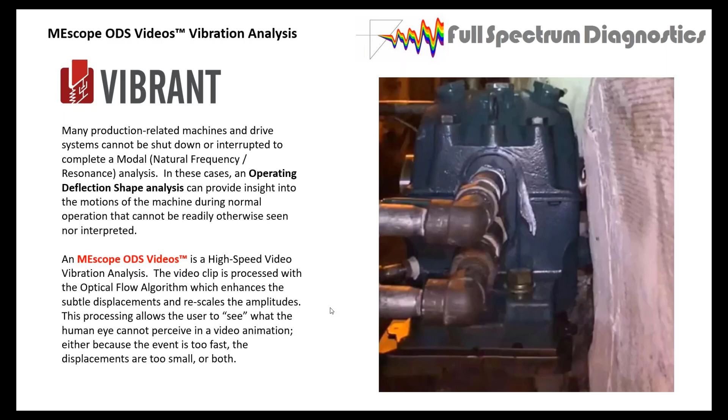This time, and I've never really done this before, but I'm going to, for some reason... I can't advance. What's going on here? There we go, sorry about that.

This unit's asset description: it's a Buffalo Forge induced draft fan, in a boiler house in a power plant. More specifically, the video clip shows the outboard bearing sleeve bearing. You have some water cooling lines coming in and out of it, and what happened was one of these lines plugged. It started eating up the bearing, and then the shaft works its way through the Babbitt material into the bearing housing and makes a mess of things.

This fan is over 30 years old. It's never been disassembled, it's been running for 30 years. They have this current problem that came up, and one of the reasons they've got some heartburn about this one is what you see on the outside here.

This is all asbestos. So they have major controls on this substance in most of the country, especially in California. So that would involve pulling a lot of asbestos out, and they haven't been ready to do that for quite a while. I wanted to show you what this looks like.

So this is the raw video, and there's a couple of things that are interesting about it. Number one, as it goes up to speed, the frame rate in the cell phone gives you a kind of really low frequency, and then you see it goes into what you're looking at right now. You really can't see the motion, even though this is pretty low frequency, it's 300 RPM.

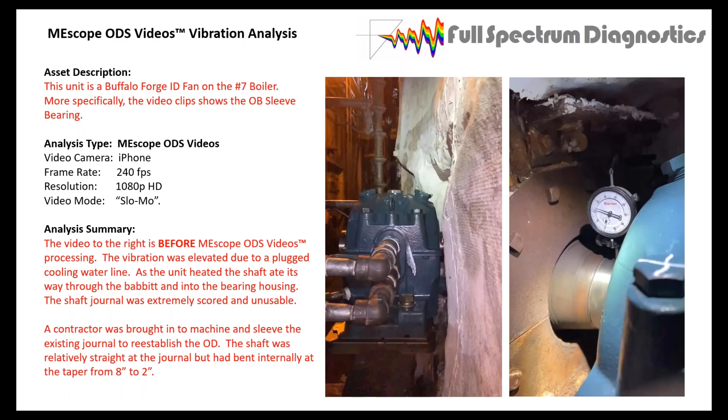This is what startled the people in the power plant. This is the turning speed of the shaft at 300, and it's an axial vibration that's occurring. Why is that doing that? There we go—so mostly axial, a little bit of twist to the bearing housing, and the reason for that was this bend in the shaft.

The resulting measurements—they had 14 mils of runout, which exceeded the maximum for the bearing, which was supposed to be 6 or less. The radial vibration was 4 inches per second. I don't think that's a very good place to run. And the axial movement was near 10 mils of motion.

We're set up right now so that we see the axial position of the bearing, and we see vertical. So coming out at us would be the third axis that we really don't detect. Our brain tries to put it together, but mostly we're just seeing this horizontal motion in the axial direction of the machine and a little bit of lifting. If we look out here, the shaft's following it, so there's some kind of bend causing that type of motion.

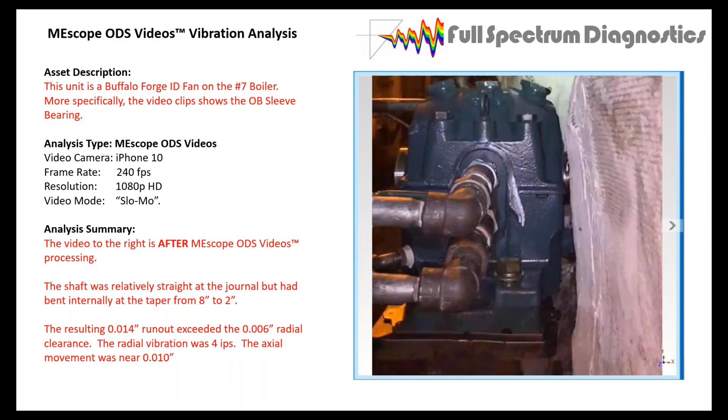This is right after the MEscope processed it for the first time. We see the top data, which is the time waveform, and the bottom data, which is the FFT, or DFT—digital or discrete Fourier transform. So that's the spectrum, and this is the waveform. I'm trying to show both of them. The time waveform picks up all the little wiggles and things in the spectrum. It's the full view of this—any wiggles in the waveform are going to be picked up.

It's all simultaneous. Down here, when I put my cursor on 1 times RPM, so the 300 CPM there, I get a filtered response of just what's at 300, and none of the other harmonics or anything going on. So this is more of a filtered vibration analysis.

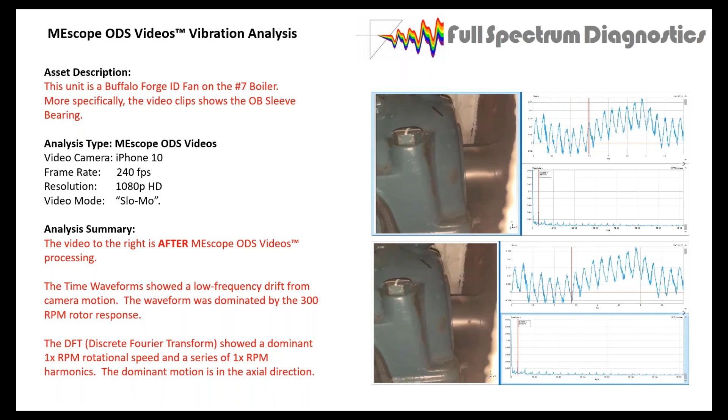This is interesting, and I'm going to get both of these going here. Remember I said the needle was the highest vibration. In this case, every time that shaft turned 1 revolution, it was banging—what looks like what's going on is the little spring in there bouncing around. Yes, but in a video representation, this is moving the most of anything.

And I get this real low frequency wiggle going under here, and the high frequency—every time the eccentric side goes through, I see an impact. It's not really an impact, but it's causing that needle to move, and the same thing up here. All these little things are spaced at 0.2 of a second; if you do the math, that's 300 RPM, and you're seeing that wiggle every revolution of the shaft.

And that shows up on our dial indicator.

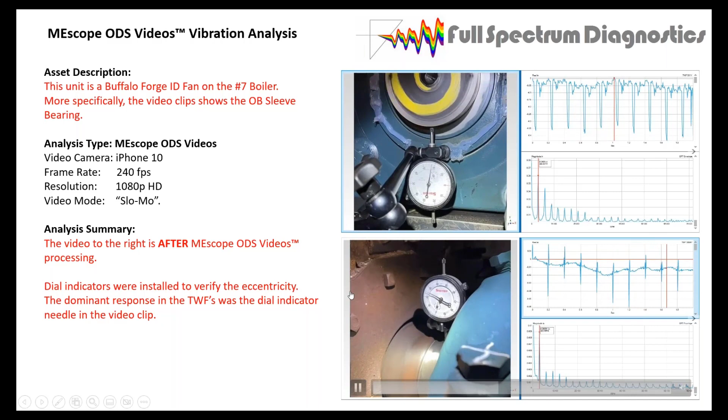So conclusion: ODS video analysis found elevated vibration at 300 RPM in the axial shaft direction. This suggests potential faults such as a bent shaft, cocked bearing journal, or a significant looseness condition. Notice the things up here—bent shaft, cocked bearing, looseness—these are things that can occur in the axial direction, and that's basically what I saw.

So they send me a video clip like this, I throw it into the software, process it, and tell them what I see. If they need another view, or I think they need another view, I'll tell them to go take some more data and send it to me. I'm missing something—but normally, if you're out there doing this type of work, you'd want to do horizontal, vertical, and axial as much as possible, just to get a good feel for how everything's moving in the machine.

So the dial indicator indicated 14 mils of radial runout and 10 mils of axial runout. Traditional vibration analysis performed by the plant guy showed 4 inches per second - very large vibration. So this is the kind of stuff in this case that stops the room from breathing for a minute when you realize what's really happening here.

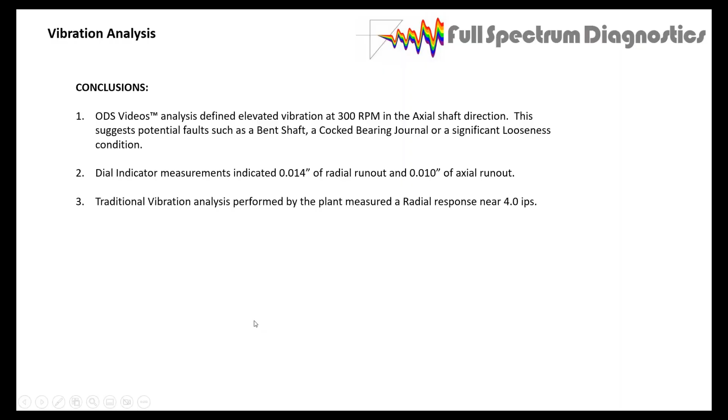Okay, that's the first one. Got a couple more here. This one's pretty cool, and I've never experienced this before, but it's pretty cool. So ODS videos again.

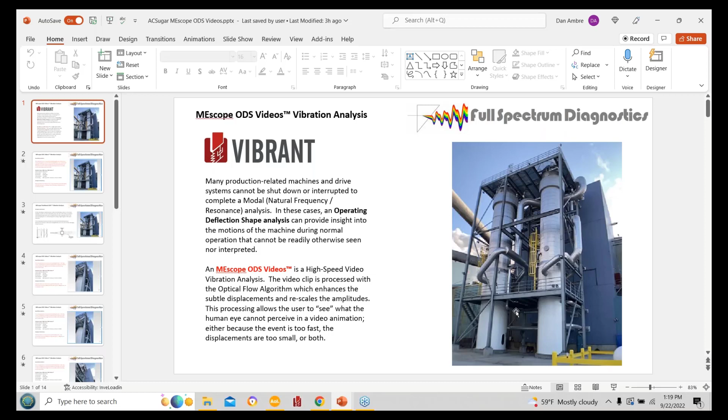We also boxed in this platform here, so we could see how the whole platform is acting like a floor, and the same thing up there - so there's maybe 20 locations all the way around the upper platform. So you put it all together, and you get some good data. In the videos, you just stand back in the parking lot and get an overall shot, then some close-ups, trying to get all the perpendicular directions to see what's going on here.

This is the first video. And you got to look at it for a little while before you see what's going on. And this is in the time waveform. So I didn't pick a frequency to look at - I'm looking at what the waveform is telling me.

And it looks like these two cylinders are in phase with each other. They're moving side to side. So the free flow of air is going into the frontal face of these cylinders, and some process is going on called vortex shedding. At least we think so.

So this unit performs a concentrated refining process. There's no rotating equipment in the framework platform or any internal agitation. The only source of vibration is internal turbulence in the process itself or wind loading that might induce unstable vortex shedding around the tanks. And we'll get to what vortex shedding is in a moment.

Here's my setup for the iPhone - again, it's the highest frame rate we can get, slow-mo presentation mode. And the analysis summary to this point is there's definite frame and tank motion. The animation source was likely a random wind gust created by vortex shedding, and the amplitudes surprisingly were very small.

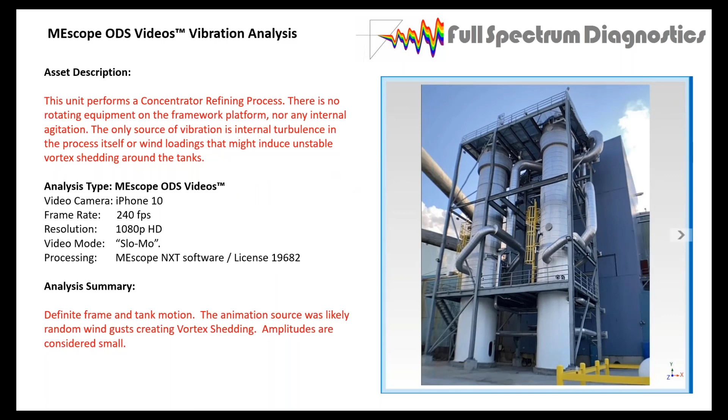Vortex shedding is a phenomenon where the wind blows across the structural member, usually across a circle like this or a cylinder, and vortices are shed alternately from one side to the other. So if you drew a sine wave around all these things, when it's shedding like this at a certain prescribed frequency, this is going to be your driving source inducing a natural frequency or a resonance condition inside your cylinder. And I believe that's what's happening here, at least up here, part of this.

Okay, so there's really no bending in the piping around here. We really couldn't measure it anywhere anyway. So all the way up here, with the wind blowing by, we get some different directional response.

Over here is a little chart for a cantilevered beam. You can have a cantilevered beam of a certain length and you'll get a natural frequency. This is the first bending mode. It goes to zero at the base, but it can swing left or right.

I just turned this presentation on its side so we can see a vertical cantilevered beam. Second bending mode looks like that. Third bending mode, you get another wiggle, in this case the 1 by 1 foot, 70 foot I-beam.

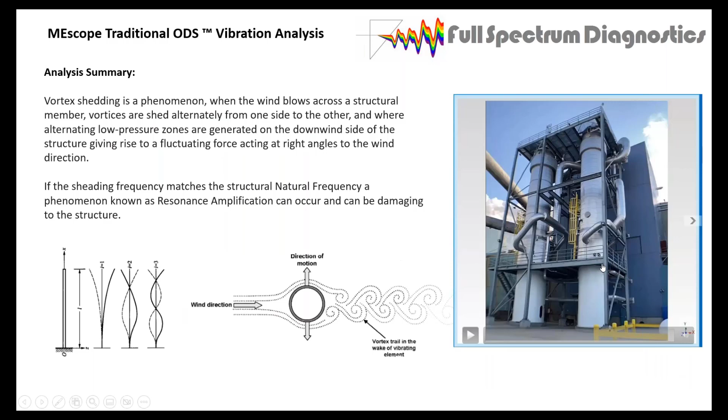I took a lot of data, different camera shots, going all the different directions and the corner directions and everything. The one I found most useful was this one. So I walked up to this I-beam and tipped it all the way up so I could see this upper portion of the structure and see what the beam is doing.

And you can't see this when you're there. I processed it and I was pretty surprised at the motion. If they're looking at the motion here, at this company, that's going to scare them a little bit.

So we did do some actual accelerometer measurements so that we could see what the level actually is, and we'll get to that in a second. What this is, is a definite frame and tank motion. It's 120 CPM, or 2 hertz. That's the frequency of the occurrence. The animation source was likely random wind gusts, and amplitudes are considered small.

Okay, there's another mode. There's a whole cluster of little modes down at the low frequency end of the spectrum. This one's definite frame and tank motion, 180 CPM, which is 3 hertz if you're a hertz guy. And this is in the alternate direction, so it's not going in the direction that we just saw. It's going more in the kind of cross corner look.

If you look up here, the platform at the top, it's more of a lateral motion around the building. This is the beam behind that, so it's closer, one of the 6 beams that's closer to the building. It's 180 CPM, 3 hertz. Again, it's not flexing this beam as much, but it's more of a rigid body corner to corner motion.

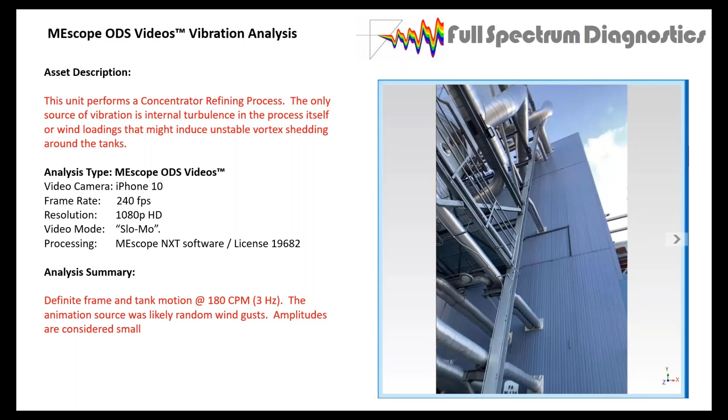Now, since we had an idea that something's going on, it looks like there is a natural frequency in this platform structure, at least 3 of them that we measured or looked at, but they could be amplified. So one of the big pieces that's missing was how much wind is required to get this thing resonating.

We put together an MEscope model, and this is a pretty rough model, but that's all you really need for an application like this. All the arrows on here, it's a little messy, but there are 357 measurements on the structural framework, which is a lot. Went up and down the boom for...

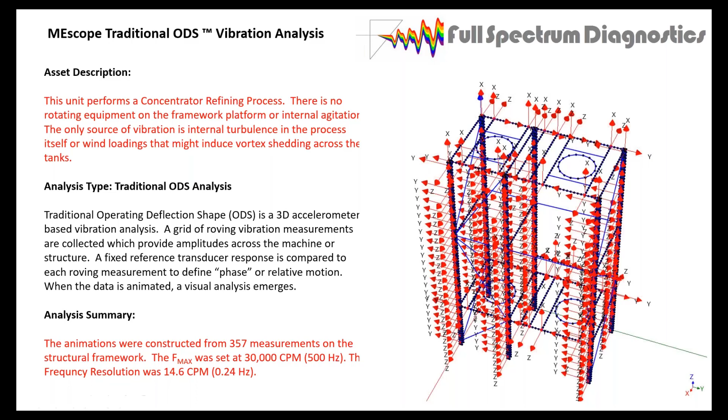4.5 of these units. There's a couple of beams in the 4.5 of these big beams. There's certain levels that we couldn't get to, but we got enough to get us the low frequency modes that we were interested in.

This is the vortex shedding again. So here's my application, one of the 6 beams, and it's moving like this. In my application, all 6 are doing the same thing. They're all moving in the cross axis here. They're all in phase with each other. The whole structure is flexing that direction.

So we have, and this was nothing operating, the unit was just forcing fluid through the tanks, and the wind was blowing. That's it. Now I've amplified this a lot so you can see this, but you'll see in a minute it may not be as bad as it looks. So it probably is doing something like this. I don't know if it's blowing past the cylinders that are giving me the problem or past the I-beams, because they'll get a different shedding frequency going on. But we'll see.

This is that same mode, constructed at 152 CPM, about 2.5 hertz. So it was very close. We had 2 hertz before, but our resolution is much better with the accelerometers than with the camera. The picture's better on the other one, but this one's better because it's put together from real data, not fake data.

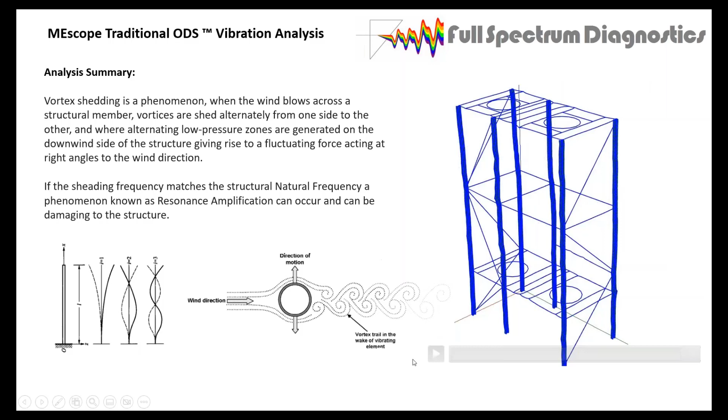And that was this one, I believe. This is the third one I picked up, at 381 CPM, or 6.35 hertz. It's the first torsional mode. So if you look from the top, this thing would be twisting all over the place. I try to use the same view all the time so it doesn't get confusing, because it's a mess of beams in there. But there's a twisting mode. From the top, or from the bottom, everything's still - this is the rigid body motion of the twisting or torsion mode. Amplitudes are on the order of 0.022, so very small.

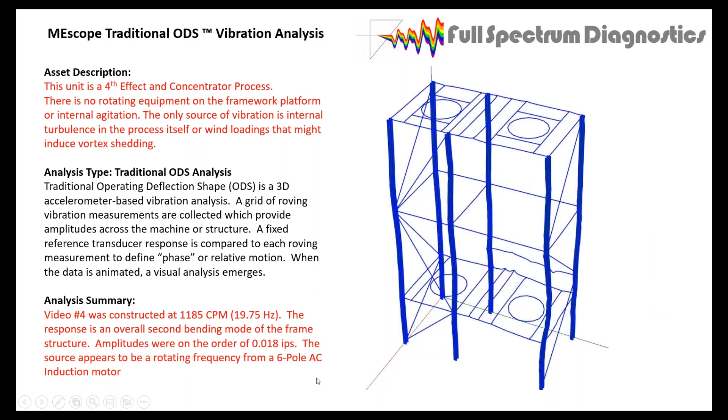This is the only one I couldn't make any sense of. This was occurring at 1185 CPM, so that's 19.75 hertz. This appears to be a 6-pole motor driving this frequency - with a little slip, it's basically a 1200 RPM motor. The amplitudes are on the order of 0.018, so still really tiny response. But you can see these three beams are moving in the same shape, so it looks like a second bending mode in the cross axis, or the longer axis.

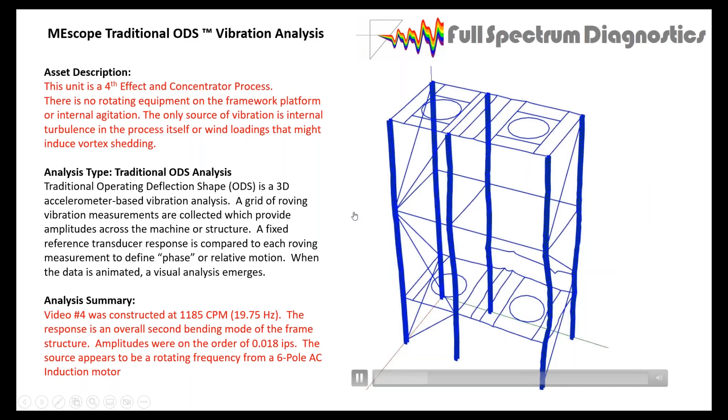Conclusions: the analysis confirmed that the concentrator tower was vibrating. Vibration analysis indicated low frequency rigid body motion of the frame structure. Traditional ODS vibration measurements were not elevated, but the response suggested natural frequency modes that were being amplified by some source, and wind is the likely source.

Potential sources of vibration were wind-related, or flow-related turbulence from the process. Wind can create unstable turbulent flow around circular objects - this phenomenon is known as vortex shedding. Transitions in the piping can also cause unique internal turbulent flow, though I think the case for that is a little less because of what they're putting through. It wasn't that turbulent.

Vibration measurements were cut short due to wind gust concerns. The man lift was wind rated near 28 miles per hour. The steady winds were greater than 21, and we really didn't know what the gusts were, so we decided once we got up about 50 feet, nah, not today. So even with the winds, the structure didn't appear to be vibrating excessively. The reason we were there was because it was probably a windy day, but one of the lights on the tower was flickering - probably just loose and moving in the wind, but you never know.

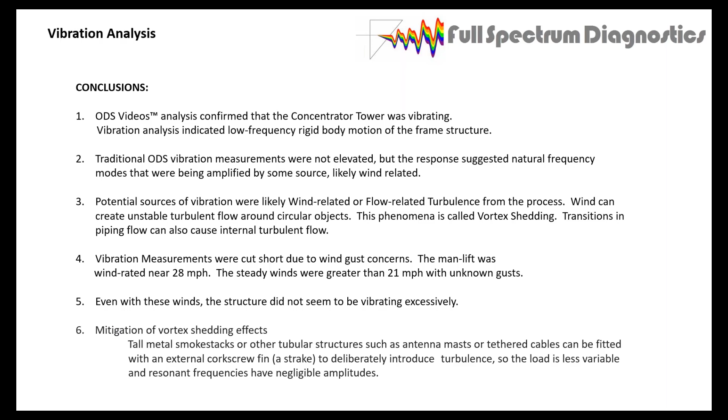There are mitigations to vortex shedding effects. Tall metal smokestacks or other tubular structures, such as antenna masts or tethered cables, can be fitted with an external corkscrew fin or a strake. This deliberately introduces turbulence so the load is less variable and the resonant frequency won't be able to build. These are a few of the corrections - I'm not saying we should do one for this, it'd be a little more difficult and expensive since it's already assembled. There's a helical strake that you see on a lot of big towers.

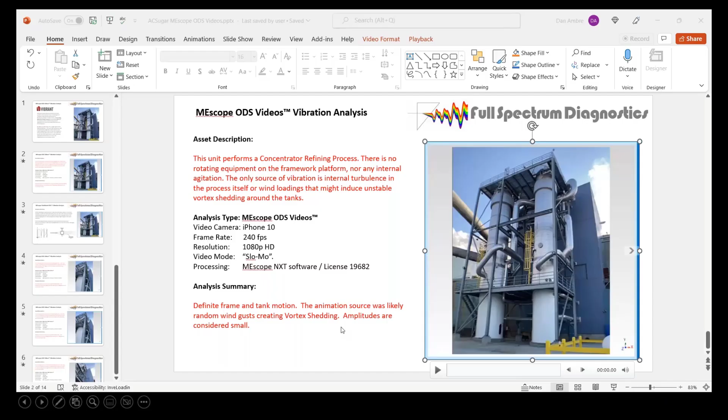Okay, we'll try one more, see how far I get. It's about 135, I think I can squeeze it in. Oops, sorry about that.

We didn't get a whole lot of input from the customer. The friend of mine, he took the data and sent it to me. He can't get anybody to tell him down there what the machine does, how it works, what the speeds are.

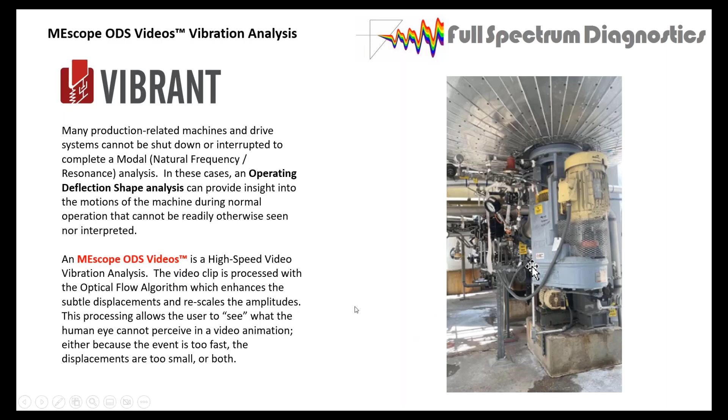So ODS video is perfect for this. This is the first shot. We can look at what's going on, and once it gets moving, you can see how all the plumbing lines follow.

The two interesting things here: you can see this line opening up, so there's something wrong right off the bat in here. Yeah, it's not any good that you have fluid flowing under the corner as well.

The hydraulic pump, this is a belt-driven pump back here, and the motor looks like it's pitching, so there's either a belt misalignment or a loose motor mount. And since the pump and the motor platforms are both on the same block, they're just moving along with it as well.

Other things of interest, there's distortion right here. Here's the shaft with a coupling on it. And this guard, I've noticed on a lot of machines, it doesn't do well with screens like this as far as animation. Don't know why yet, I'll have to figure that one out.

By the way, every job I do with this thing, I learn more and more about different ways to think. Just like the little needle on the gauge might show the highest vibration, but it has nothing to do with what you're dealing with, the whole structure globally.

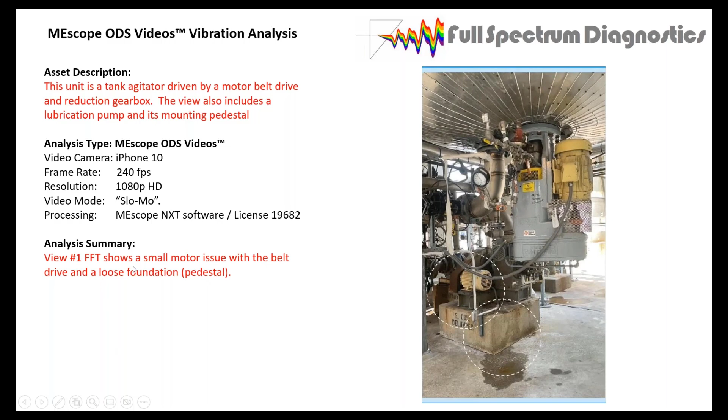So view number one, this is the FFT view. Remember, we can look at it in the time waveform or the frequency domain as well. So it shows a small motor issue with a belt drive and a loose foundation pedestal.

I have another view. So basically they walked around and shot different views at the bottom of the tank and this motor gearbox structure. And in the background were things I was interested in.

So here's that hydraulic motor or hydraulic pump. Here's the belt drive that drives it. And you're sitting on a block, and you can see motion in the block between that and the floor.

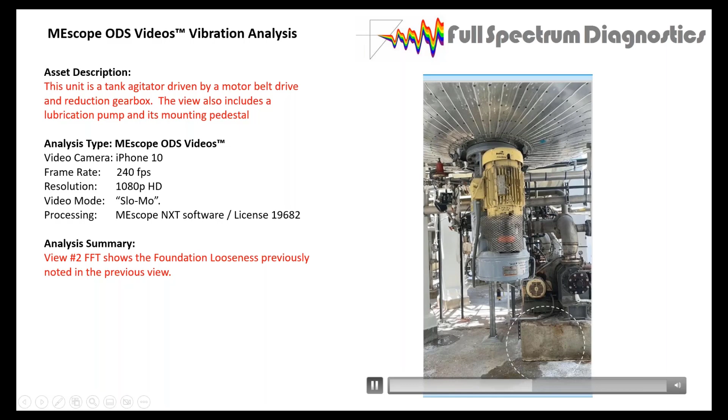Another angle. More motion in the motor down here and the block lifting off. Just little piping motion in there, that's pretty normal.

I had to process this a little bit differently. I had to remove some of the pixels or grid points because this was, I don't know what it was, just a plastic strap or something, and it was moving around, so it showed the highest vibration. And here's probably another one I missed. This would show a high vibration as well.

This is the time waveform look at the same thing. So when I'm doing a frequency analysis, I remove all the background. I keep this in the foreground so I can see what it's doing, and I move around this pedestal so that I can isolate it, and everything else in the background, the floor, the wall back here, all this piping, I can turn off.

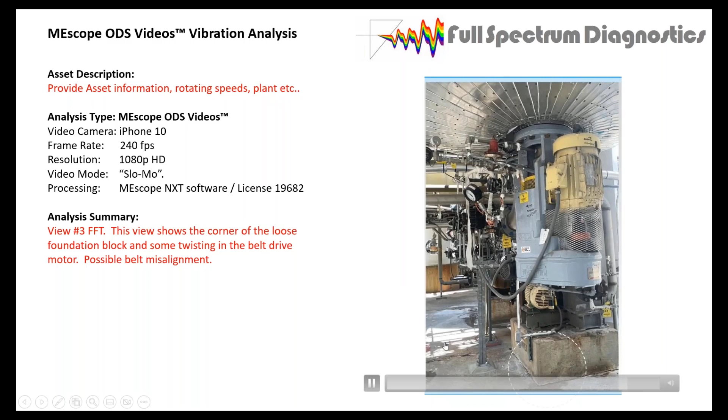So it doesn't show up in the animation. See how this is all not moving a bit. Here, I'm allowing it to move, but I'm looking for this base. So if I have a loose base here, I know what it looks like. This one should also be moving if it has a loose interface, and it doesn't appear to.

So I have there and there are good. This one's shaking quite a bit, as we've talked about. This column here also has a little bit of a jitter to it. Okay, so that's in the time waveform. This is in the frequency response.

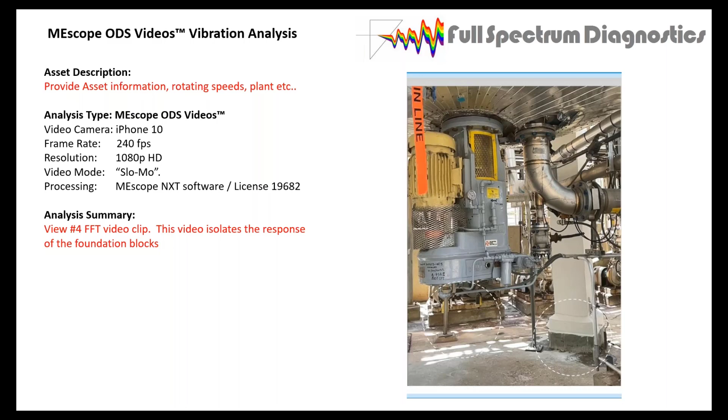So now, same thing, these blocks back here look good, and these are moving, but we're filtering to a certain frequency. That was another thing too - they didn't tell us what all the tooth counts, belt lengths, anything like that, even motor speeds, so we're kind of guessing at what frequencies to worry about in the spectrum.

This is the time waveform of one of the blocks. Here's that hydraulic pump. Motors on the other side, you can't see it, but a lot of action going on, and a lot of motion in the piping. This is filtered to what I think is turning speed of something. It might be the hydraulic pump.

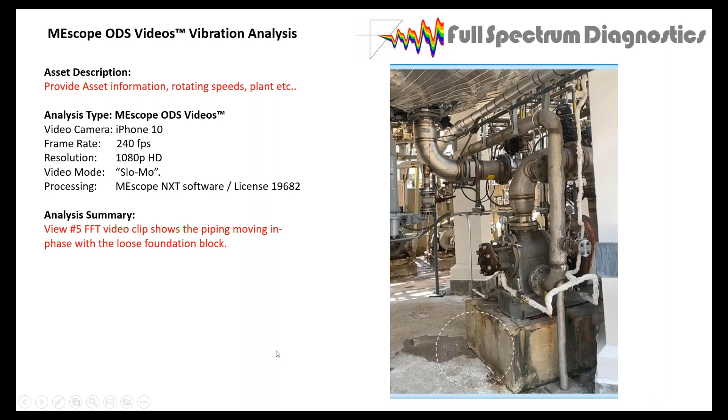But now there's a single frequency that we're pulling out. That's one of the dominant peaks, and you can see the loose foundation. And the last one's just behind the motor, or the agitator. There's the motor up there, and so forth. And we're looking at that.

We're looking at the hydraulic system, how it's moving. And one of these videos, the friend of mine that sent it said this was vibrating, but I don't see it. Either it's in the wrong view here, or it might be shaking in the view coming toward and away from the camera, but it doesn't look like it's going horizontal at all.

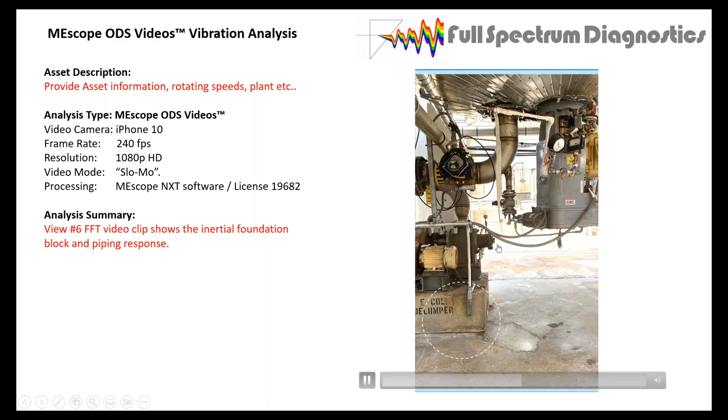This is some other stuff. This is miscellaneous vibration. I believe this is some type of sensor or light panel or something up here. I couldn't tell what it was. This is just a pipe that's shaking, and you can't even see this going when you're actually running if it's not enhanced like we have it here.

So I'm interested in the foundation and then whatever else is going on, any potential fatigue problems. And that's, oh, we got one more. Maybe I got a couple more. This is previously, this is the time waveform version.

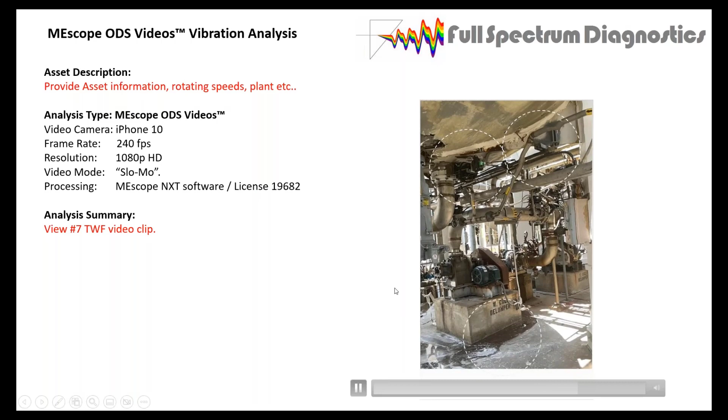So you can see everything kind of moving slightly, but nothing really bad. This is the frequency. So I dialed into these two frequency peaks, and they're moving.

And that's all I have. Got 3 quick case histories, a lot of different camera stuff going on, different ways of looking at the vibration response in ways you wouldn't think is normal before.

Now you're thinking, oh, wait a minute, I have a little dial on my dial indicator that's moving up and down more than anything else. So I'm gonna get a spectrum with a very high peak. And it has nothing to do with how good or bad the machine is. It's just a moving peak.

I've had the same sort of thing. Somebody walks through the background while you're taking data. Somebody has a flashlight in a dark area and they're in the field of view. All kinds of things like that where it's not traditional vibration. It's just how the camera interprets what's going on in the field of view.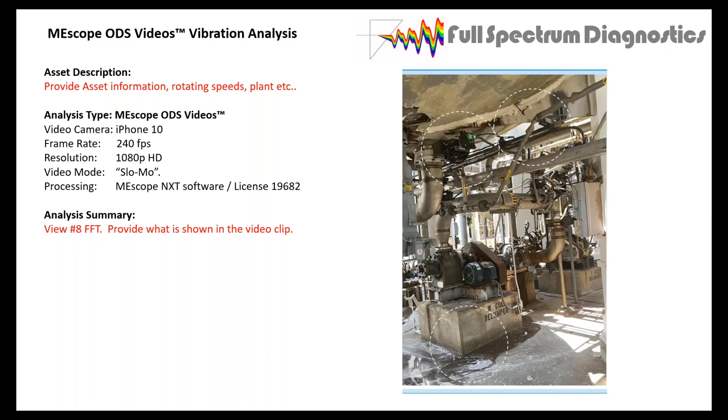Oh right, yeah, we did do that. For the rest of you guys, if you want to go back you can take a look at that one - again, back on the YouTube channel, I definitely know that one is up there.

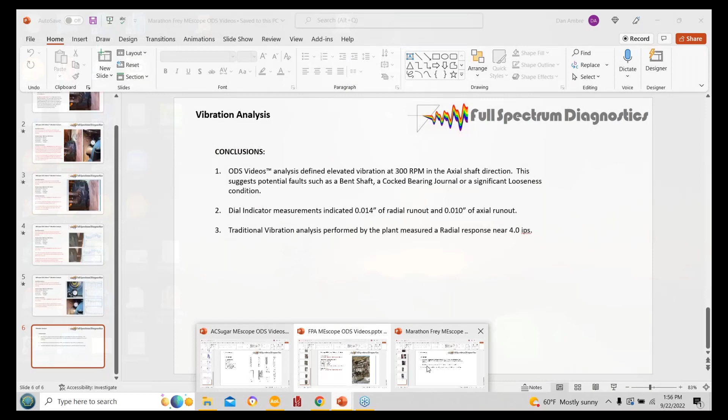No, no - just empirical thinking. You'll see stuff that you've never seen before and it doesn't seem right. Just work on explaining it - there's always a solution to the problem. That's all I have.

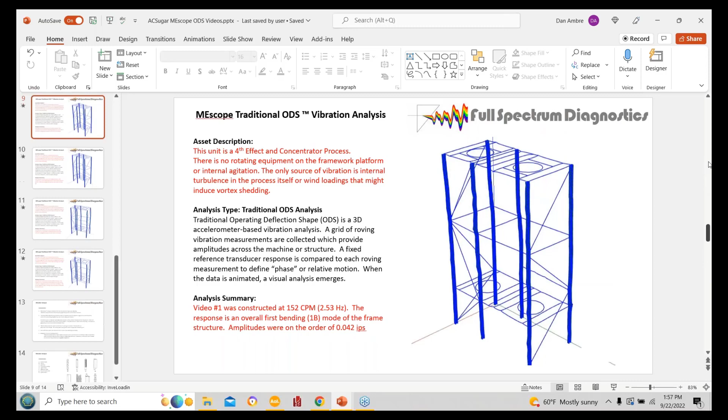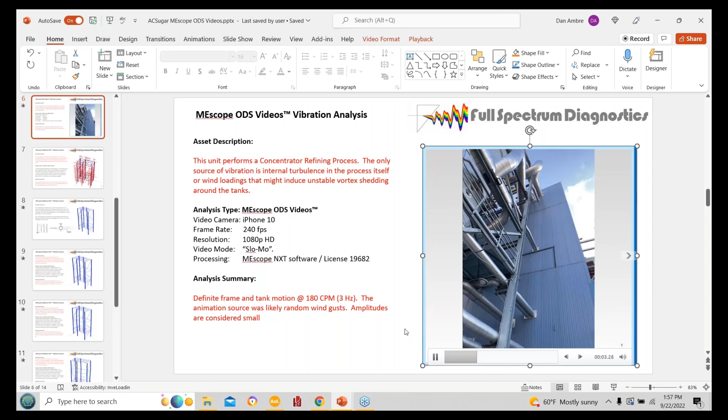I do have one more thing - was this done with the accelerometers? Oh, the other one, this was all video. Okay, if I get the software, the ODS videos comes with the video software. It also comes with the accelerometer-based 3-dimensional software, so there's ODS and then there's ODS videos. There you go, I always forget to say that.